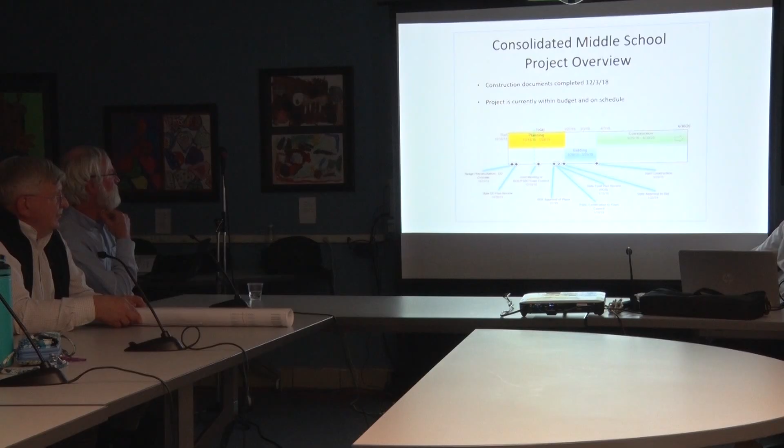So just as a quick review, the construction documents for this have been completed now. We've got them all ready to go up to the state for their final review. The project is currently within budget and, amazingly enough, after a 3-month hiatus, on schedule. The timeline indicates the joint meeting of the Board of Ed, PSBC, and the Town Council today at 12:10. We're looking by the 7th of January for Board of Education approval of the plans. The Permanent School Building Committee will then certify to the town that those plans meet the education specs no later than the 10th. We have a special meeting for that.

They're going up to the state for final plan review on the 15th. We expect to hear back from the state no later than the 25th of January. If that's the case, we'll be able to go out to bid as soon as we get that word from the state. The plan at the moment is that we would like to start construction no later than the 25th of March in order to get this thing completed on time.

So we have a very tight window, and the architects and all the folks at the administration and the board of education administration, Dr. Grenier and his people, have been wonderful in helping us figure out what we want to do with this space and how to make it as flexible and usable as we can possibly do it within the budget.

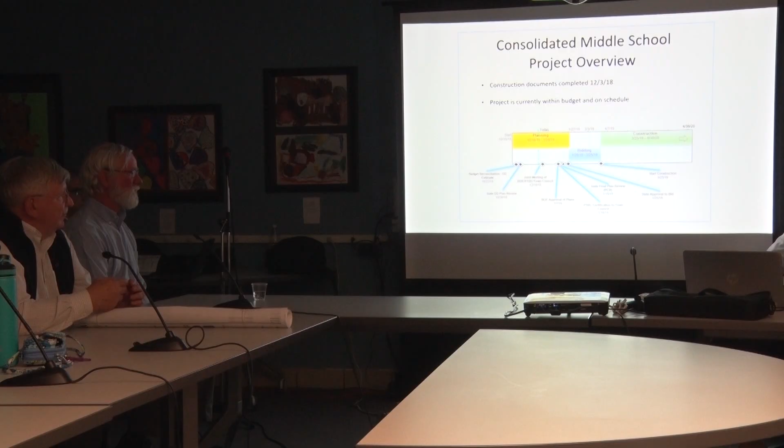So I'm going to hand this over to, oh look at that, that's the next one, we'll come back to that. That's at the end. So I'm going to hand this over to Amy Samuelson, who is with SLAM Collaborative, the architects for this particular project, and she's going to take you through the building.

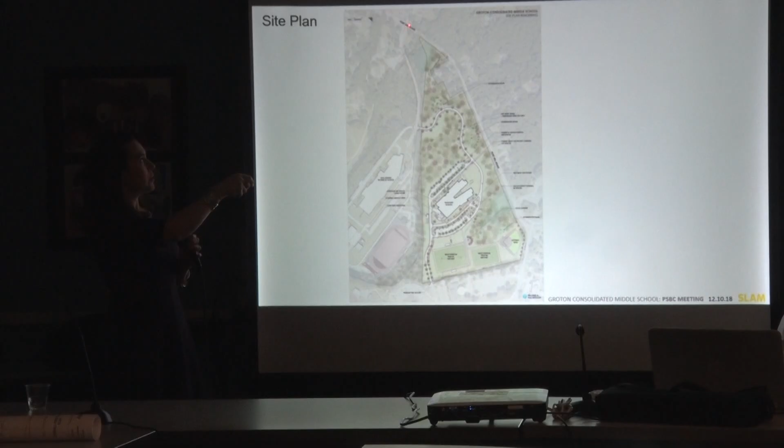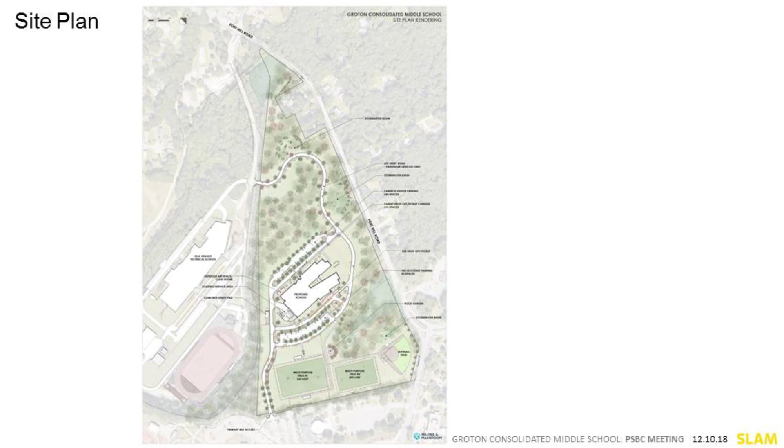And then the other entrance is off of Fort Hill Road, and you'll see that that shares the Ella Grasso Technical School driveway at a point a little ways up the hill of Ella Grasso. You'll find a new entrance to the site, and it meanders across the site because of the steep grade change from here to where the building is located. It takes a route around the hillside and up to the location where the middle school will be built.

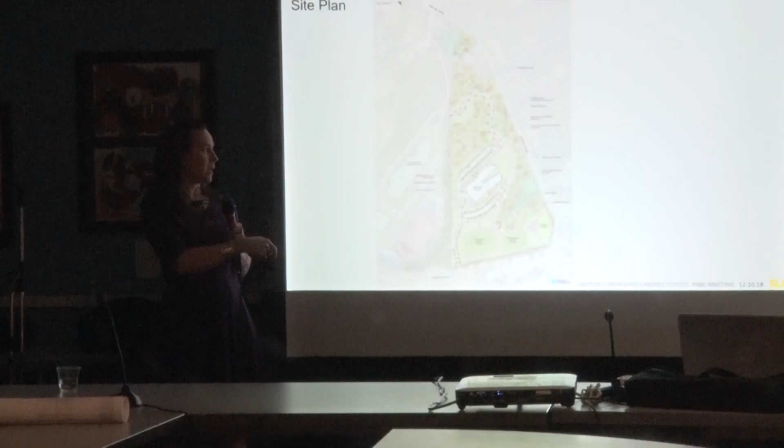So the middle school is situated in such a way that the second floor is the entrance level on the east side of the building. And because it nestles down into the hillside, the lowest level or first floor is where you access the building from the west side. So the entrances on either side of the building are actually on two different floors, but they're connected by a main concourse that you'll see in our interior renderings as we move forward.

Zooming in on the site plan a little, I wanted to share with you some of the site circulation. So again, from the Fitch High School side, you're passing the athletic fields that will be included as a part of this project. There's a large full-size field for athletic events, a smaller field, and a softball field included in the project.

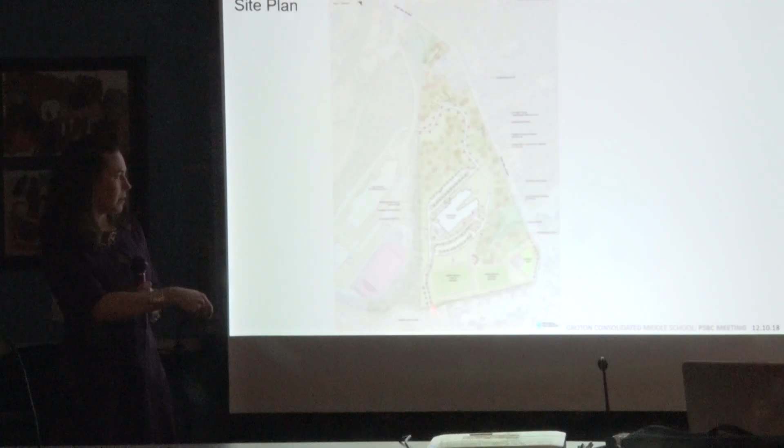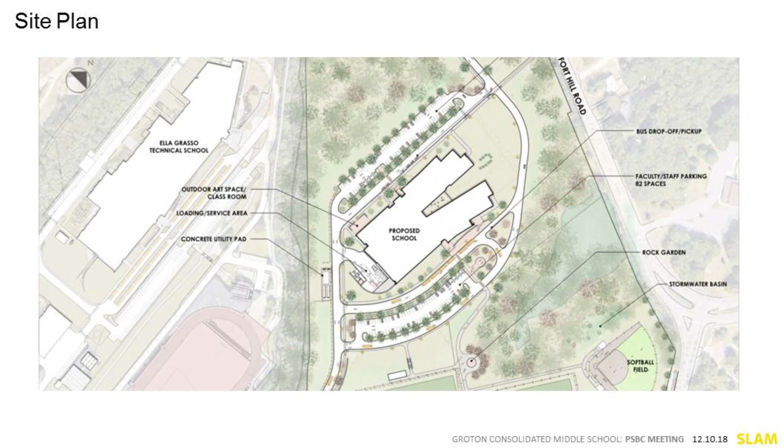So zooming in again, the site circulation is that the buses will come from Fitch High School, pull up and around, and drop off at this main entrance on the second level. Parent drop-off will come from the Fort Hill Road entrance and be directed to drop off at this lower level. This lower level will also be where the administration is housed and where all visitors will enter. So for security reasons, all doors will be locked to the school, including this upper entrance, and all visitors will be directed to the lower level.

After school hours, for events, you'll want to use this parking lot to access the fields and the gymnasium and some other public spaces within the building.

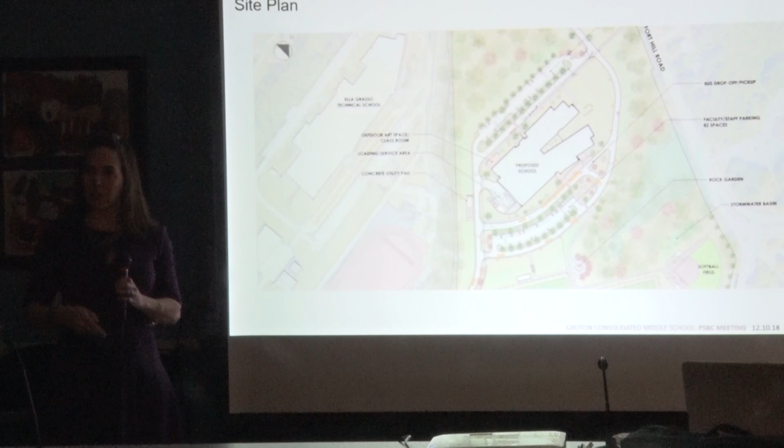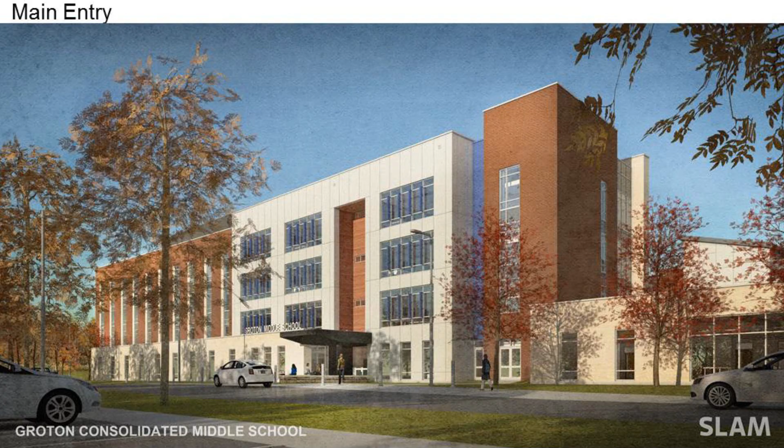This is an image of the entry of the building on the west side, the lowest level and main entrance. You'll be greeted on that side with a 4-story wing of the building, which is the academic tower. The first floor is administration, and above are the academic classes.

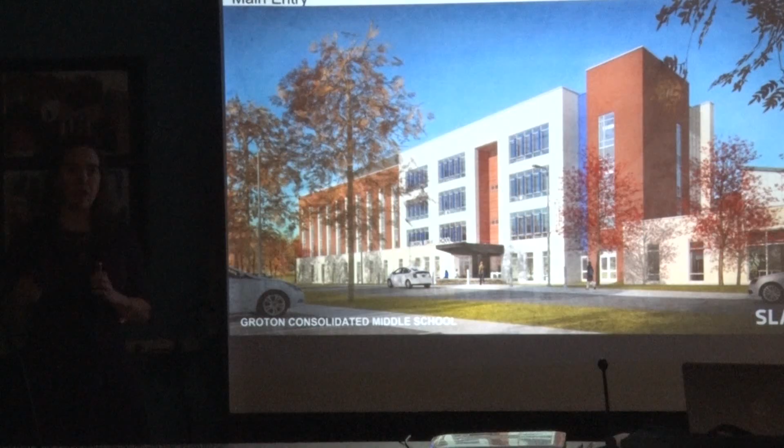Here's the first floor plan. The entrance is at this location, central to the building, with a locked vestibule for security where there will be a sign-in and a window to the reception area. All visitors will be badged at this location, then allowed to enter into the waiting room or pass through to the school proper.

In dark blue here is the administration, the guidance department, and the nurse's office and school-based health clinic. Also on that same corridor are some mechanical rooms buried into the hillside, and some daylit rooms including a couple of special ed rooms, a multi-disability room, and the ABA room.

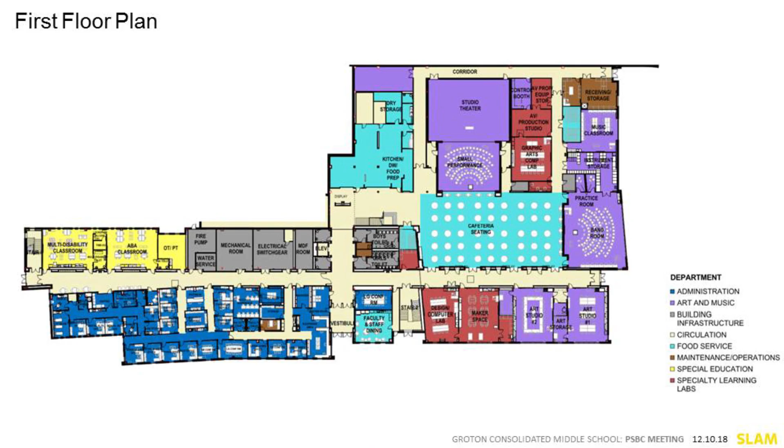On the south portion of the building, we call this the podium level. There's a mixture of visual and performing arts surrounding the open cafeteria. The cafeteria is really the heart of the building, allowing people to pass through on their way to band, orchestra, chorus rehearsal, or drama class. It also acts as a wonderful place for gatherings, and I'll share in the next few slides how dynamic this space can be.

Along the front portion of the building are a makerspace and engineering lab that speak to the STEM focus in this building, with an AV production studio and graphic arts lab in the rear. At the front, with generous windows, are the art studios.

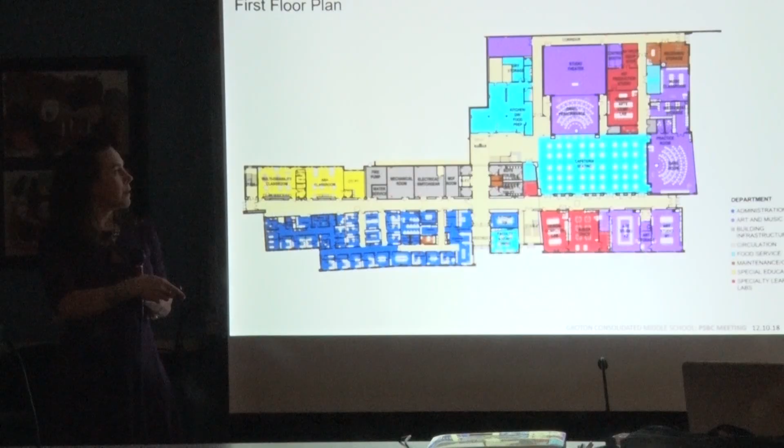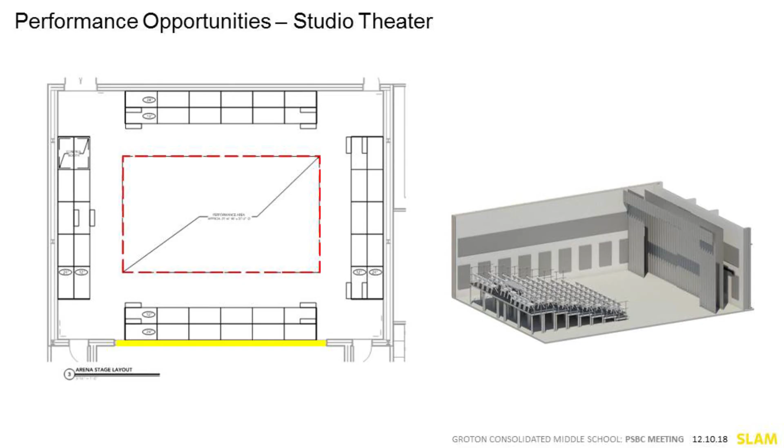Performance spaces can be held in many spaces within the building. We have a lot of flexibility built in here, and there's a studio theater — essentially a black box theater like you might have seen in other facilities. It's a new asset that Groton will be able to use.

Students from Fitch might want to use this too, and we know it's a great asset for this building. During the day the room will be used for choral rehearsals and drama classes, but with risers it can become a performance space in many configurations — set up this way, or with a thrust stage, or as a theater in the round. It'll be a really dynamic space.

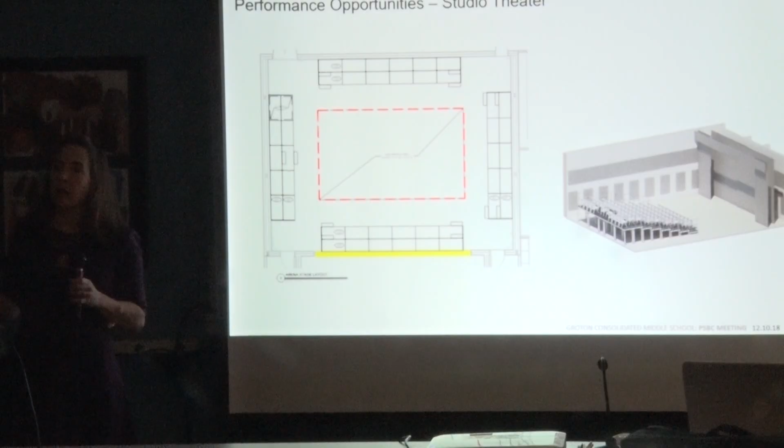Along this wall of the studio theater, you'll see what I've designated with a yellow line — that's a skyfold partition. It's a large 30-foot wide opening that rises like an overhead door, opening up to the neighboring room, which is a small performance room.

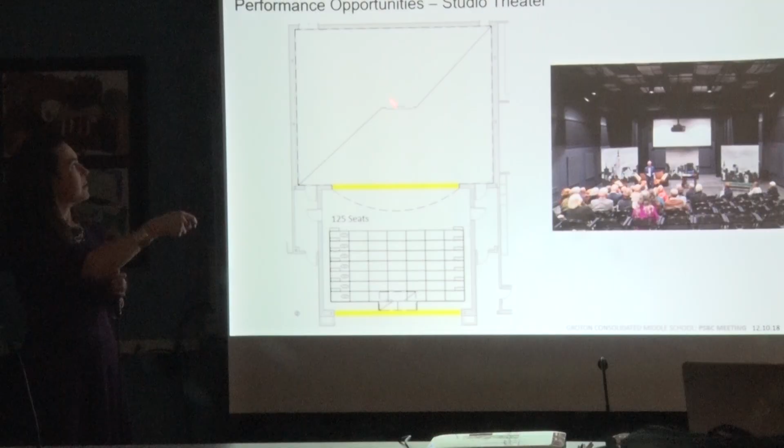So this is the studio theater we were just looking at, and you could put the risers instead into this other space, and when that demising door rises, you get a nice, very large performance space.

Those same risers can be set up as a flat platform for the orchestra to perform, where another wall opens up. This back one could be closed, and this other one could open up to the cafeteria, allowing for good audience seating of 270 people.

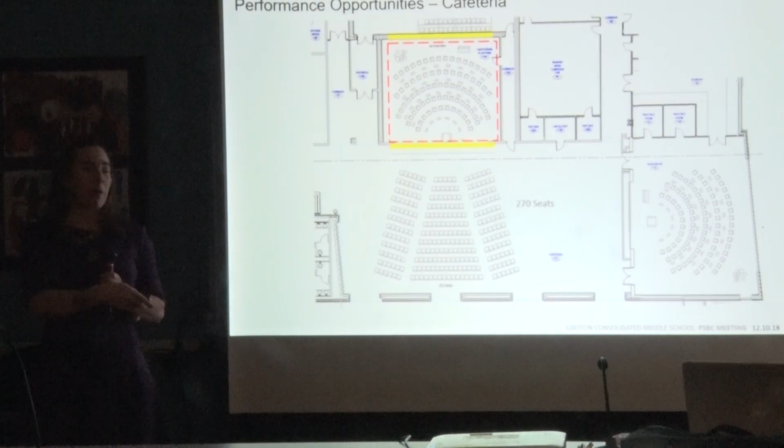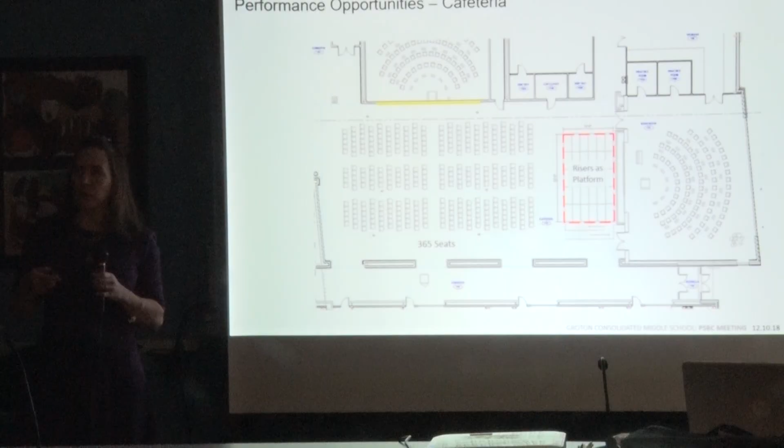Configured in a different direction, close that door, put the risers at the south end of the cafeteria, and you end up with a performance space for about 370 or 365 audience members. We're really excited about that space, and I hope it gets used in all sorts of different fashions.

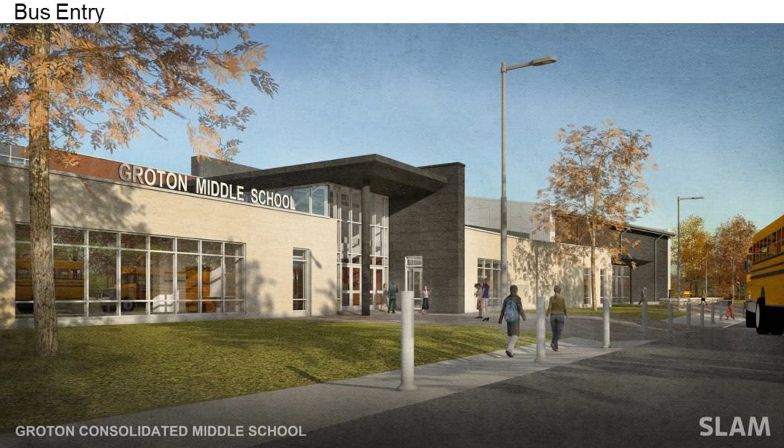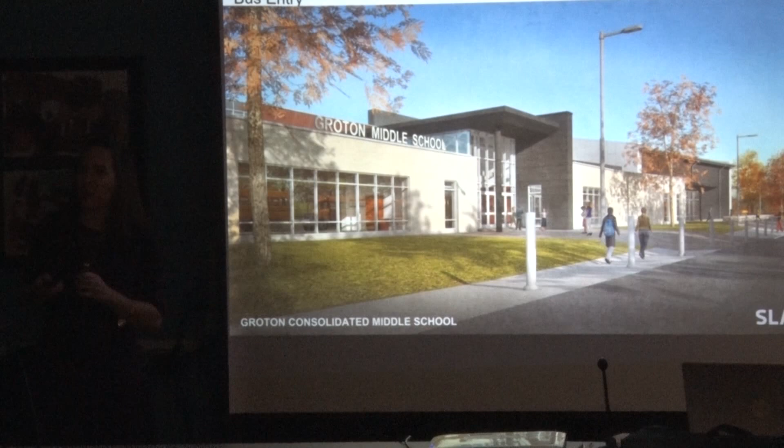The second floor entrance on the Fitch side, the east side of the building, is a totally different scale. We expect most students will arrive by bus or from Fitch, entering the site in this direction. The height of the building here is really 1, maybe 2 stories where the gymnasium pops up — a much smaller scale, welcoming, and we hope correct and fun entrance for the students.

Those students will enter the building here at the west end, at this main concourse, which travels down, and you can actually see down with a railing into the cafeteria below. A grand stair will take you from the main entrance at the west side down to the cafeteria for those performances I was just describing.

It also allows quick access to the Library Media Center and to the phys ed department, which includes a movement studio, a fitness room, and the gymnasium itself. Locker rooms and associated support spaces are also in that same area on the second floor.

The building can be zoned for security reasons. We never really want the public to enter the classroom wings, so for after-hours events, when the public is invited into the space and might travel down this corridor, there are doors which close off the academic wing. The academic wing includes standard academic classes, the science lab, a couple of special ed spaces, and a faculty workroom for support.

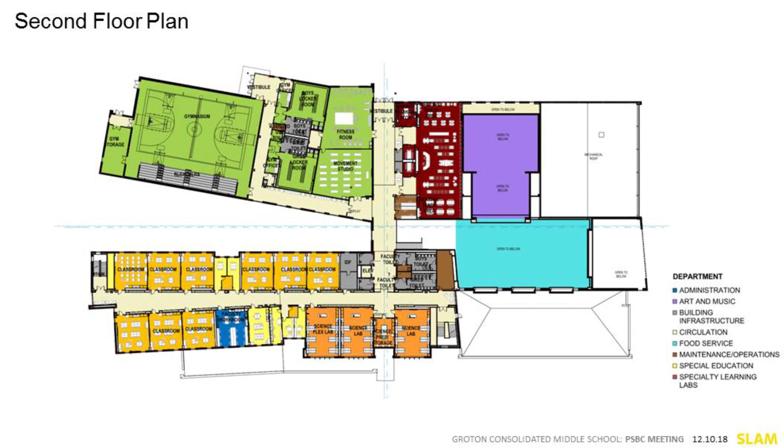On every floor, which can be set up as 6th grade, 7th grade, 8th grade, or set up in teams, there are 3 pods of classrooms on each floor and a pod of science labs. So you could instead do 6th, 7th, and 8th grade on one floor. Flexibility is built into the plan, allowing your pedagogy to develop as you move into the building.

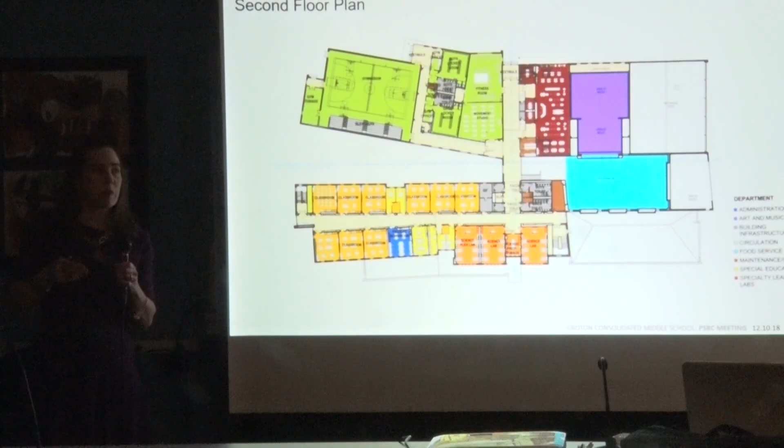That area would be zoned, so if the public is coming in for an event at the gymnasium or invited for a basketball game, doors would separate this area of the building from the remainder, or doors here would separate the cafeteria and lower performance spaces from the academic wing. We're trying to keep the most flexibility and use of the building in mind while also allowing for appropriate security.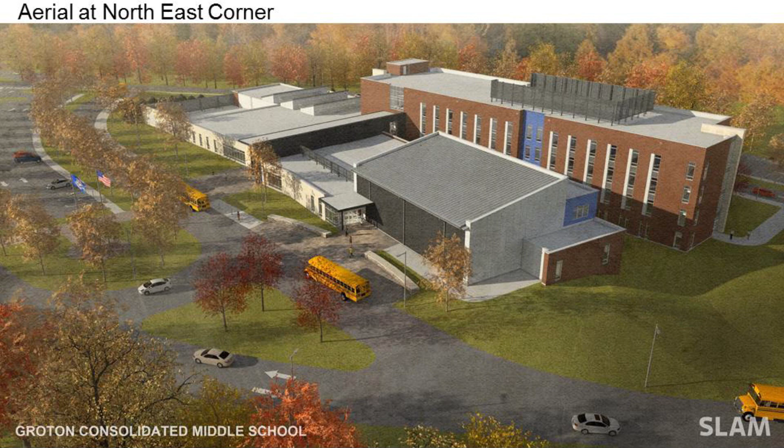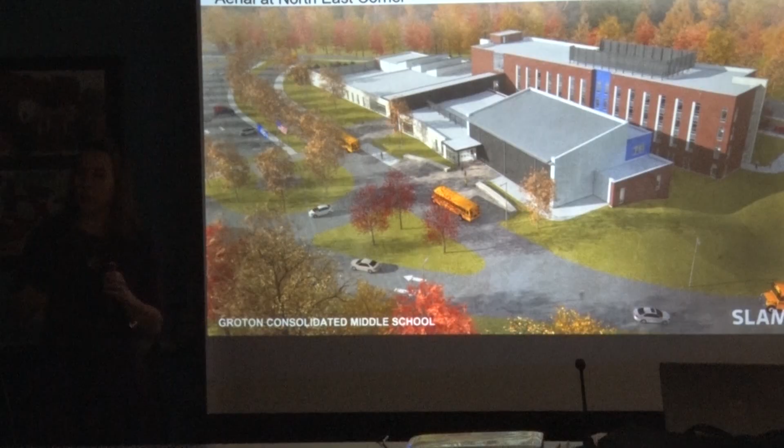This box here with a sloped roof is the gymnasium. If I go back, it's hard to tell, but there are windows into the gymnasium, so there is some natural daylight in there. Daylight's really important to us, so we've tried to develop that, and as we move through the interior spaces you'll notice that's an important feature throughout the building.

The interiors, the vast majority, are really set up with a palette of neutral colors: a warm wood tone and very neutral colors for the floors and walls for the majority of the school. We've splashed in some color for wayfinding and for just a nice amount of color, accent walls, and tile in the rest of the building. The way it's been designed, we really thought about nature—the ocean, the earth, the sky, and the heavens above, or maybe the sun.

As you move up the building, you're going from first floor, second floor, third floor, and fourth floor. Each one is designated with a color so that it's easy to recognize where you are in the building when you're getting on and off the elevator or the stairs.

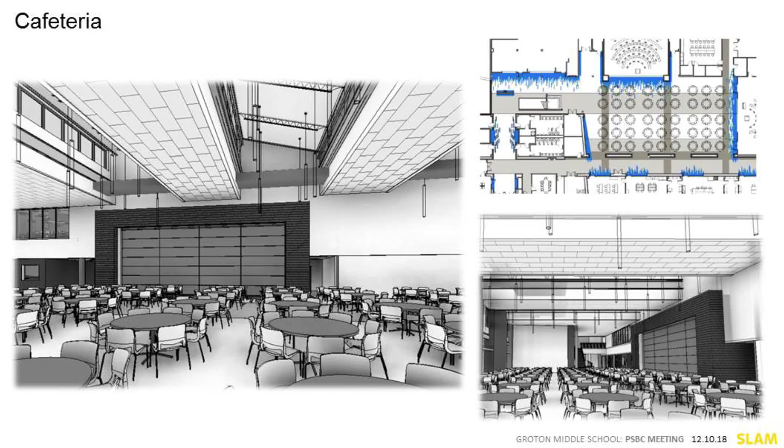The cafeteria has been developed as the heart of the building. Food service takes place in one portion, and then the main seating is here in color. You'll notice there are sawtooth clerestory windows above, so although it's on the first level and sort of buried into the center of the building, there's a lot of natural daylight you'll be able to enjoy in this space.

Beyond, you can see this peak. This is the concourse that brings you to the second floor public spaces, and also from the second floor parking lot allows the public and invited guests into the cafeteria area.

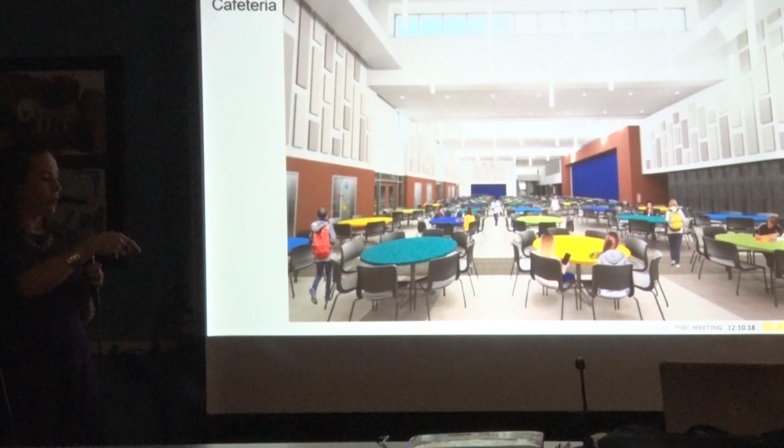I should mention also that for durability, the walls are brick, tile, and other durable materials at the lower level, and then as you move up, the painted gypboard is covered with acoustic material. While it will be a large space, we also know that we need to control some of that noise.

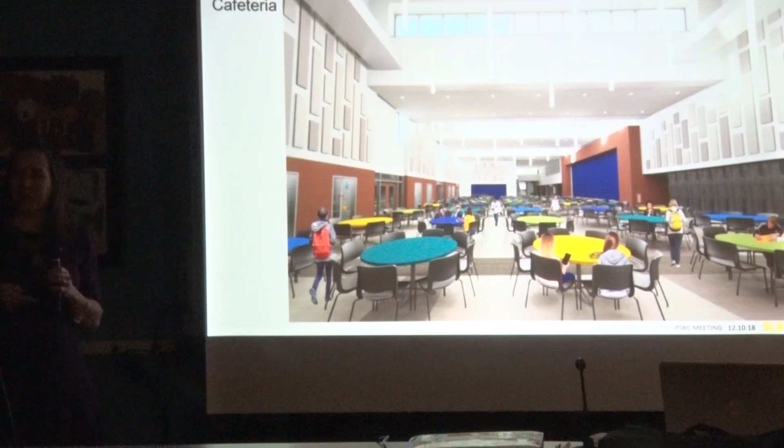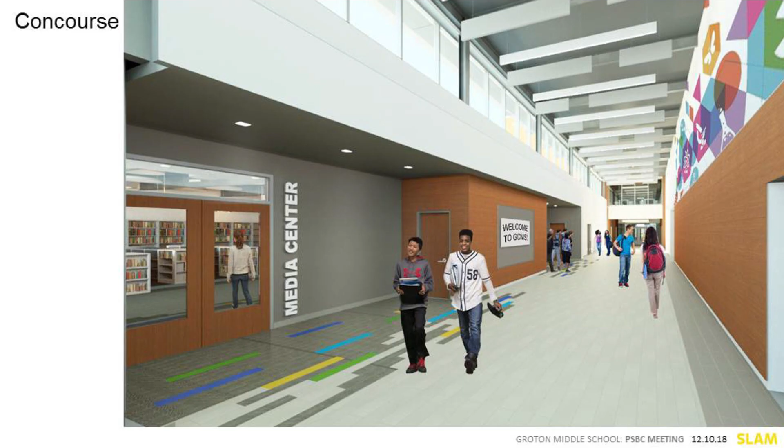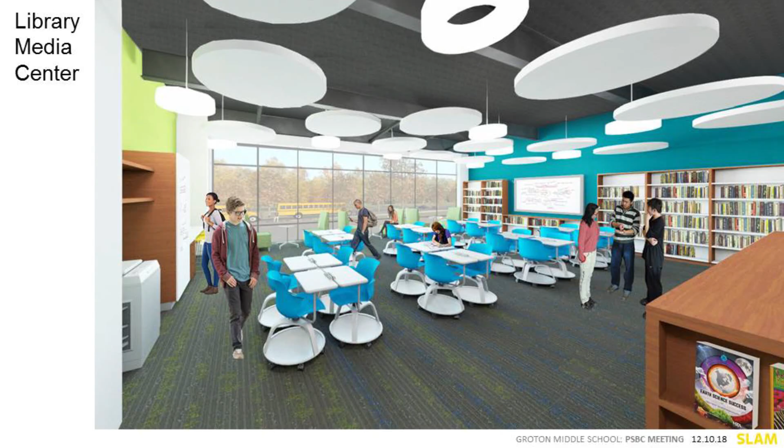Inside the Library Media Center, there's flexible furniture. There's of course the stacks, but we have high stacks against the walls, and in the center we have low stacks for visibility, so you can see that here. And the ceiling treatment has acoustic clouds, and some of those are lit, so they are the light fixtures as well as the control for acoustics.

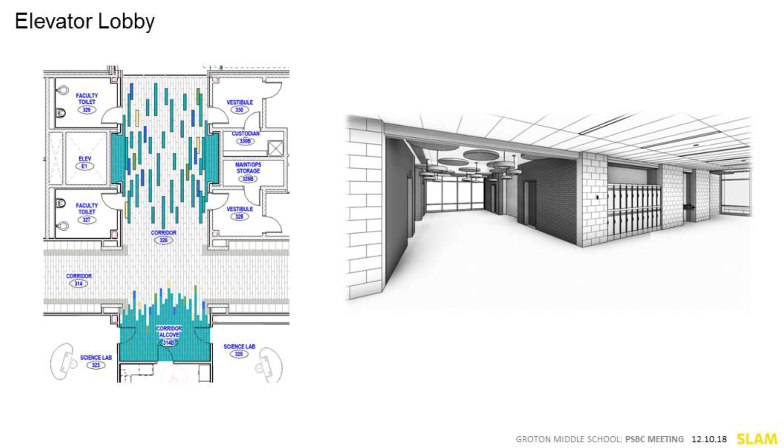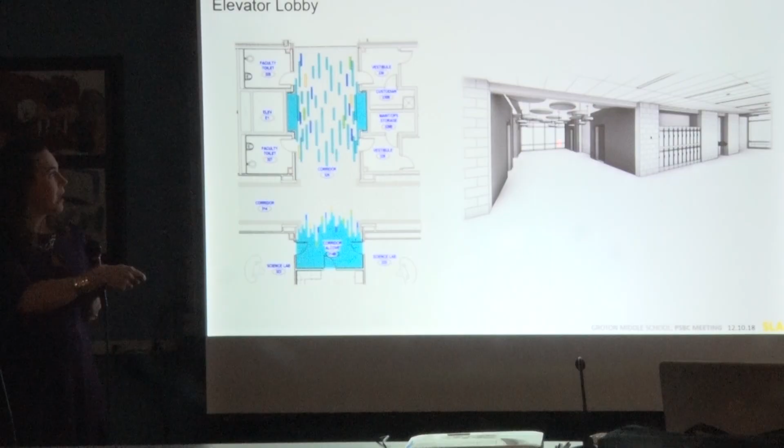The elevator lobby is also the location where the bathrooms are on every floor, and where the entrance to the academic wing is. On each side of the elevator lobby you'll see there are views. At one end of the academic classroom corridor there's windows, and also at the side entrance on the third and fourth floors. This is looking out toward Fitch.

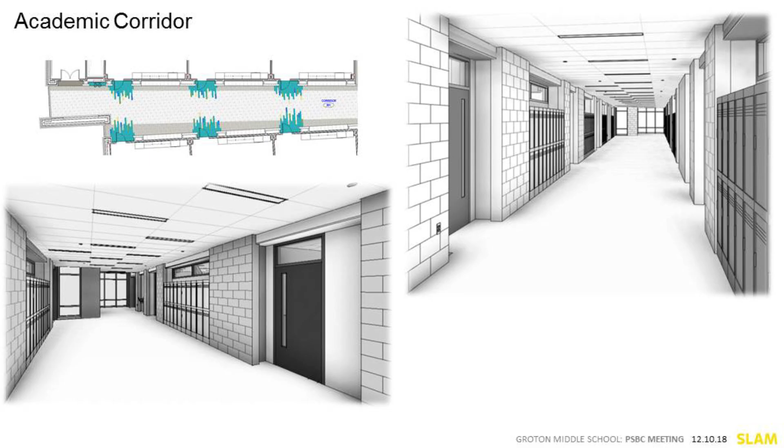In the academic corridor, of course, you'll find the lockers, but we also find it's important to have daylighting in there. Although it's in the center of the building, we've got windows that go from the classroom to the corridor, allowing you to borrow natural light from the exterior within the classrooms into the corridor, so you'll see windows above. But those are carefully placed for security reasons, for lockdown, so you get the daylight, but you also get the security.

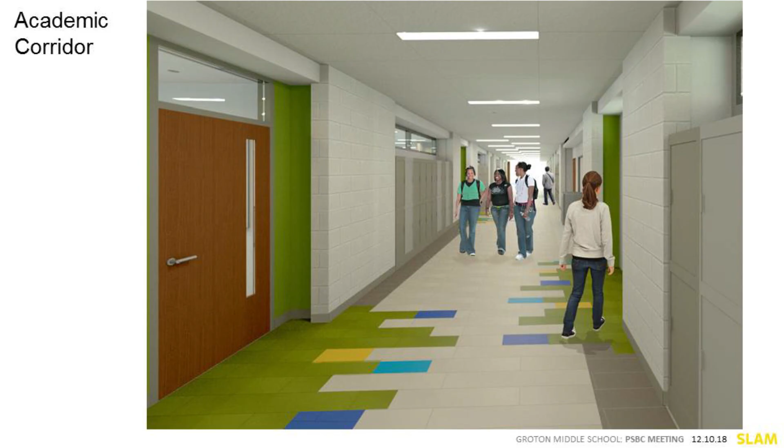The door has a narrow light, as do most classroom doors, so you can see out and make sure you're not hitting someone when you open the door. But you'll notice that narrow light is actually on the hinge side. This way, if an intruder was in the school and broke the glass, they wouldn't be able to reach the door handle. So these are little built-in security features we're trying to implement throughout without making it feel like a prison.

Yeah, for lack of a better word.

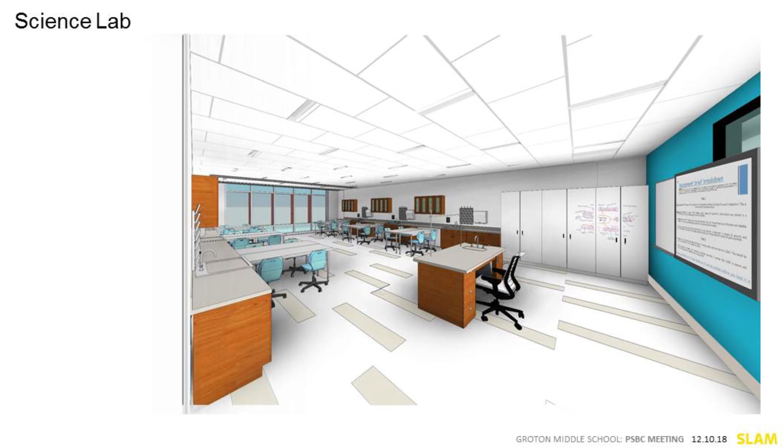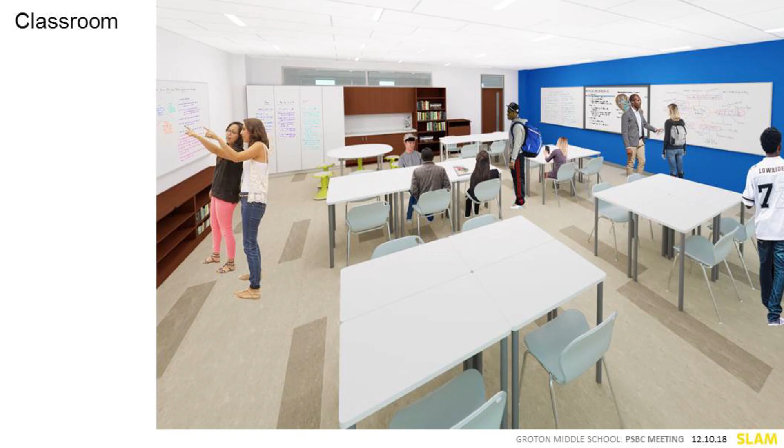Classrooms and science labs will have the accent color representative of what floor you're on—in this case, it's the 3rd floor. You'll see the built-in casework for the science labs, and in the classroom the furniture is very flexible. It's a series of desks that can be put together in groups or taken apart, set up like this for a seminar, but allows the teacher to set it up as they'd like. There's also some choice, with a round table and some choice of seating.

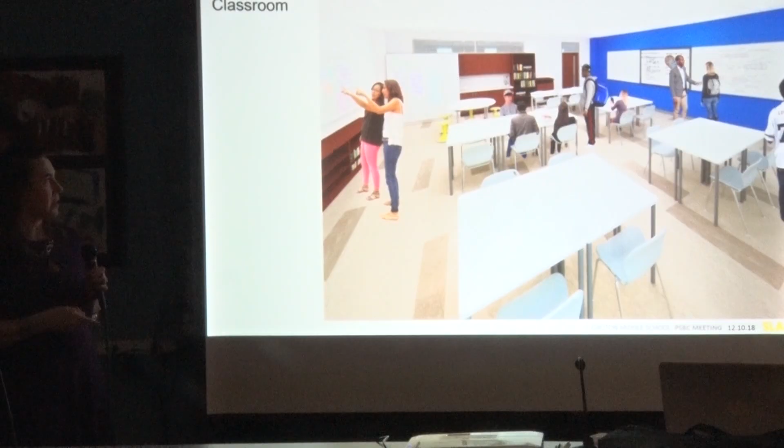Thanks, Amy. I'll take the opportunity to thank you all for having us here today, and I hope you're all excited as we are for such a great design. We're thrilled how it's come together. My name is Kemp Morhardt from the SLAM Collaborative. As Amy mentioned, I am the principal in charge for this project, and we've been working very diligently over the past 5 months—yes, only 5 months, hard to believe. But we're all thrilled with how the design has come out, and I hope you are too.

The last bit of the presentation is a video of the outside of the school. So strap your seatbelts on.

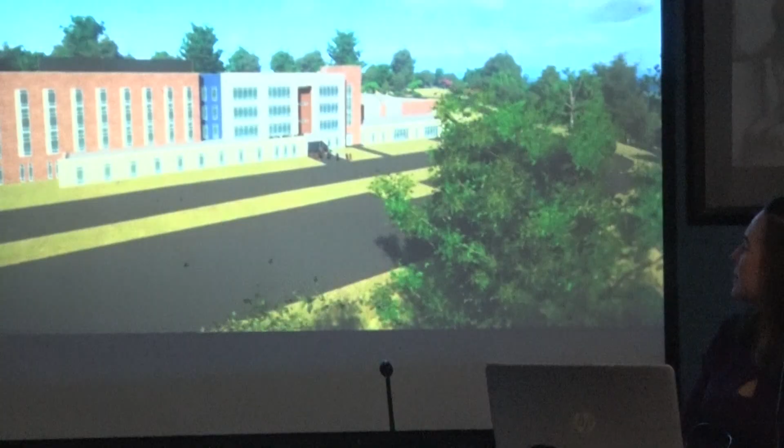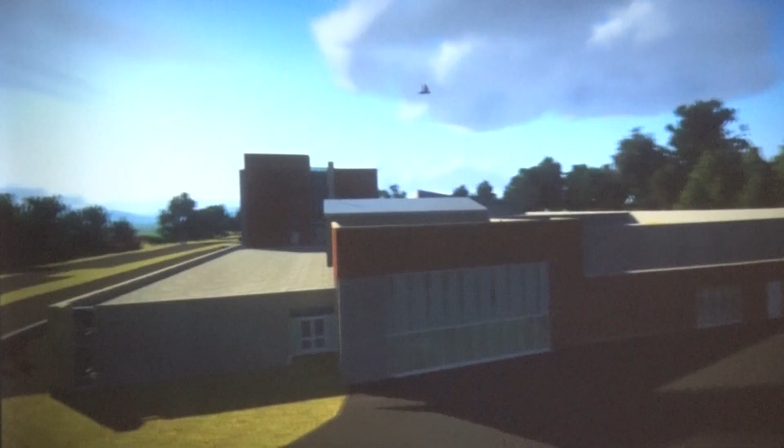You can see the sawtooth over the cafeteria. Moving around to the keyboards—that's right, the keyboard. Love that, I think that is so cool. The new windows are intentionally designed like a keyboard. This will be the bus drop-off. Moving to the gymnasium. And then there's that space in there too.

The kids are designing an outdoor STEM classroom for this space in math class. They want to see it to fruition, so they've got a couple of different plans. Some chose that corridor, and some chose other areas out in the outside part of the building.

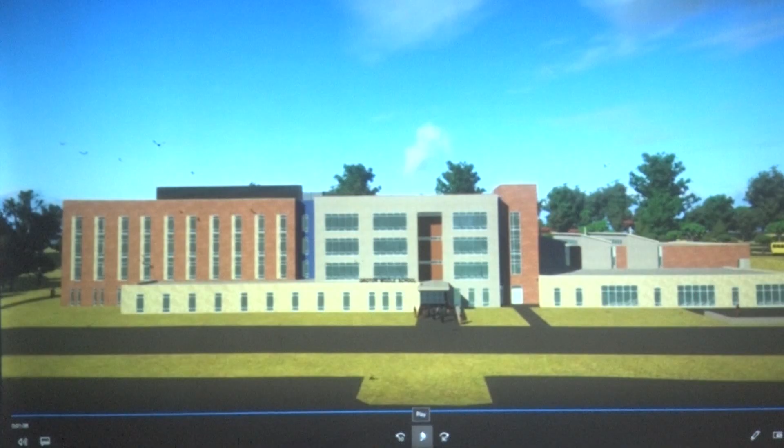Andre, could you turn on the lights? Go to the last slide. Which is the first, second. There are more chairs back here if you guys would like. Jay? Rita? Oh yeah, if you can plug in for that, do that. That would be great. One last image before we go to Bob's closing. You're going to say one more thing.

My name is Jack Butkus. I'm a program manager with Arcadis, and we're assisting the town with all 3 of the projects for the 2020 plan.

One of the tools we've used on other projects, you've seen the fly around and the site plan. But what is this really going to do within the neighborhood? So we've got a little before and after. We don't have all the site features like the sports fields rendered in, but go ahead.

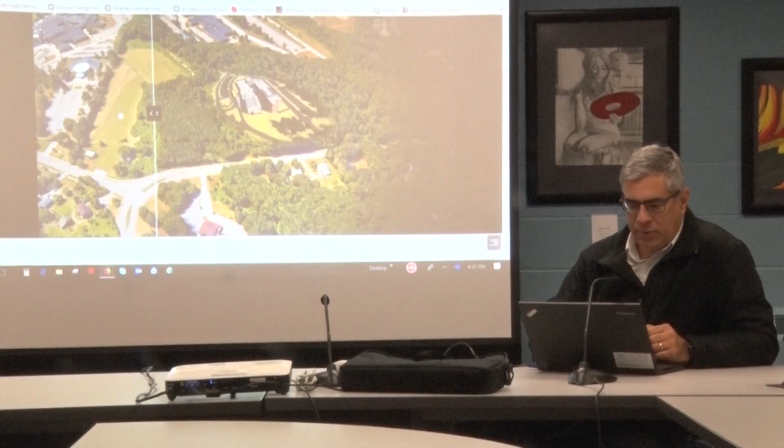This area here in the darker green is the wetland that is going to be preserved and avoided by construction. The softball field will be up here in the area where the Merritt House exists, the smaller practice field centrally, and the larger sports field down here close to where we will tie in to the Fitch driveway.

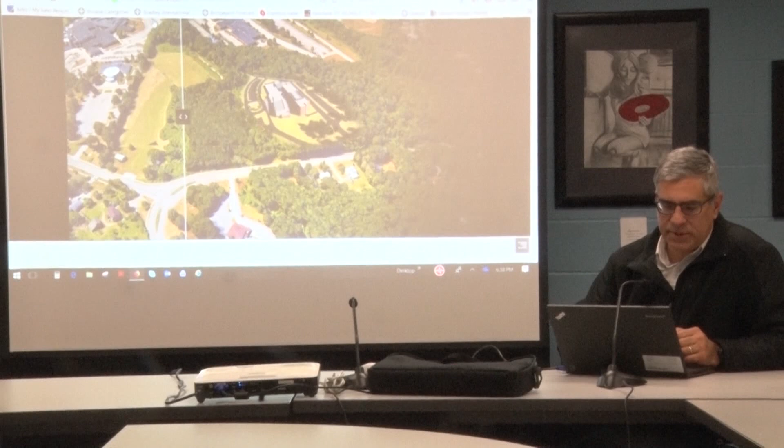This is going to be reconfigured slightly in this area of parking for the buses, and parents will move up to the front portion of the Fitch. Right now the buses drop off here; that'll be converted to parent drop-off, and the bus loop will come into this back area through the side parking lot at the rear of St. Mary's Church. There will be an access way cut through the trees leading into this loop drive and into the campus.

I have just two questions. One, if I were getting married on a Saturday afternoon in that church, and there's a soccer game going on, how rude are we being to the church? Are we far enough away that some bride isn't going to be cursing us somewhere?

We do have screening requirements in the town plan. There's a significant wooded buffer right now. We need to complete that buffer.

Will the wedding video include cheering from a crowd? I don't think so, because it's indoors for the wedding. Depends how loud the bride is. Well, they are closer to the high school, I think, but they're not next to the athletic fields. So I was just thinking of that.

The other thing is, at one of the newer schools in Waterford, the parent pickup drop-off area, somehow they must have thought everybody drives subcompacts. Because we're all in minivans, and it's the scariest thing I do every day is pick those children up from that school.

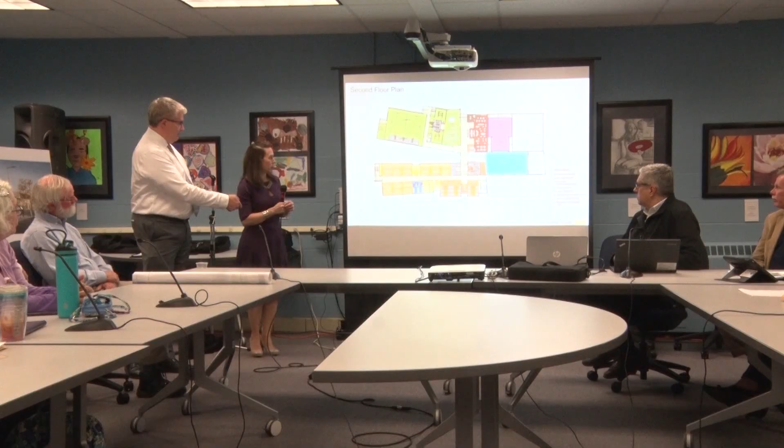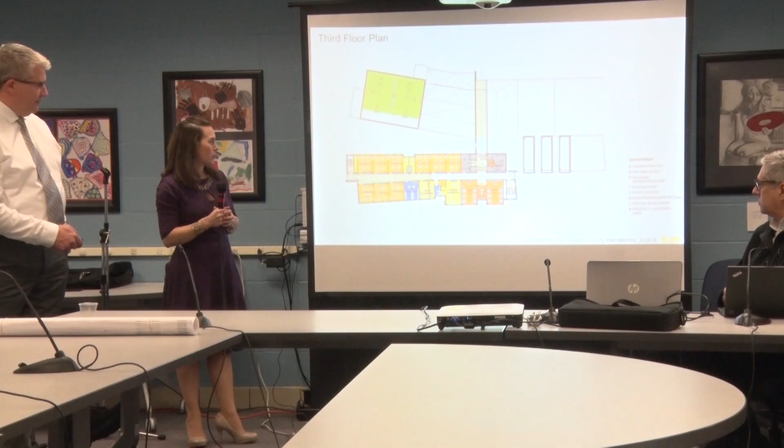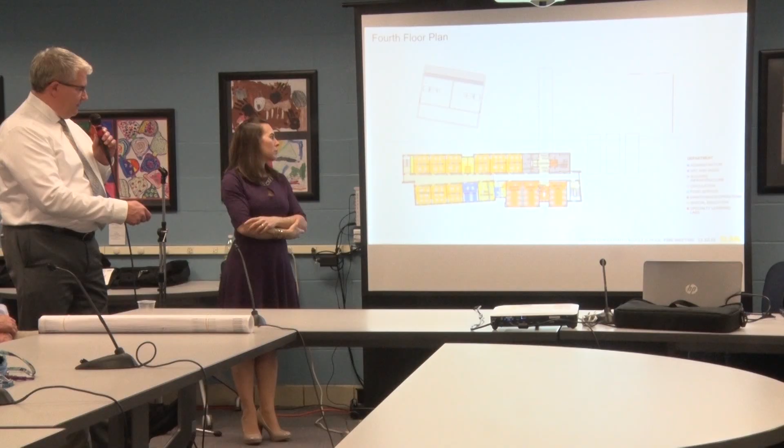So the resource rooms, you'll see them on the floor plan here—I believe there are 4 of these, there might be 5, on one floor, with administrative offices on the upper levels. There are 2 graphic arts rooms, one on the second floor and one on the third floor. Special ed is in yellow on the plans. We have the resource rooms on each floor, for a total of 6—these are small tutoring-type rooms for 6 students. And then we have the special ed classroom here.

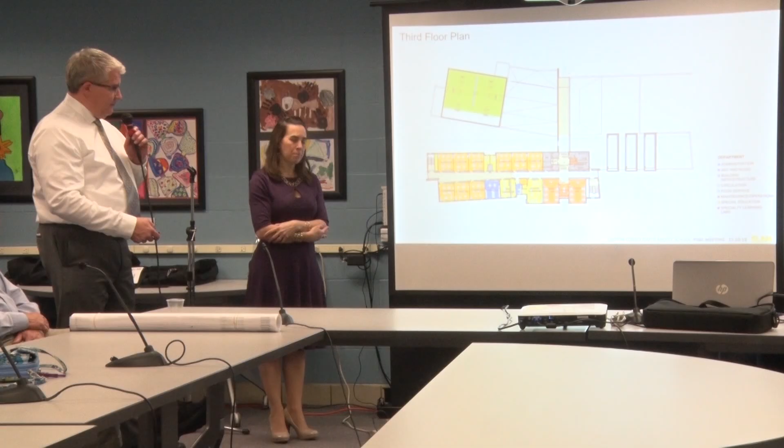And would foreign language be part of the academic rooms? Yes, part of the 27. All right, thank you.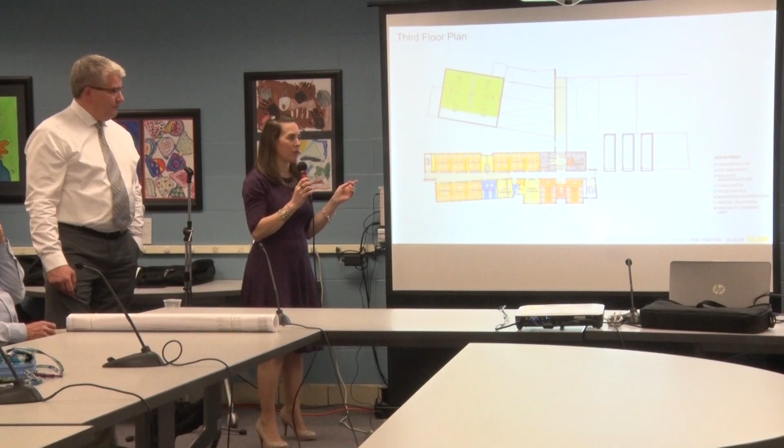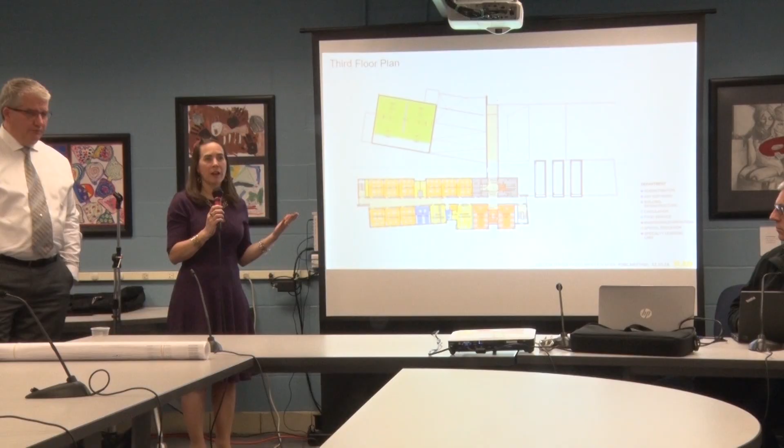I think now would be a good time to mention that the faculty workrooms are sized so that in the event a classroom is shared by more than one teacher, each teacher has their own space in the faculty workrooms, and there are faculty workrooms on each floor. Those spaces are also set up so multiple faculty members could work together on projects they're bringing into a group of classes.

Rosemary, you have your questions. What are the yellow stripes on the end of the building? That's a shaft. That shouldn't be yellow because that's misleading—I'm sorry. Is it a special ed shaft? It's not. It allows for mechanical systems to travel from floor to floor.

I'm curious about the potential for maybe solar panels on the roofs at some point—is that something that could be factored in? Absolutely, solar is a great resource that can always be added. There's a lot of space on this roof, and that can certainly be added at any time. We're actually looking to put infrastructure in for the three sawtooth roof areas—they're facing south, so they're perfectly well suited for it.

Having gone to school there, there's a lot of wind. Is there potential for any sort of wind energy also? We haven't designed wind power into the current plans, but again, it's something that could be added by the district to supplement the energy provided. We looked at a number of alternate plans, including geothermal and wind.

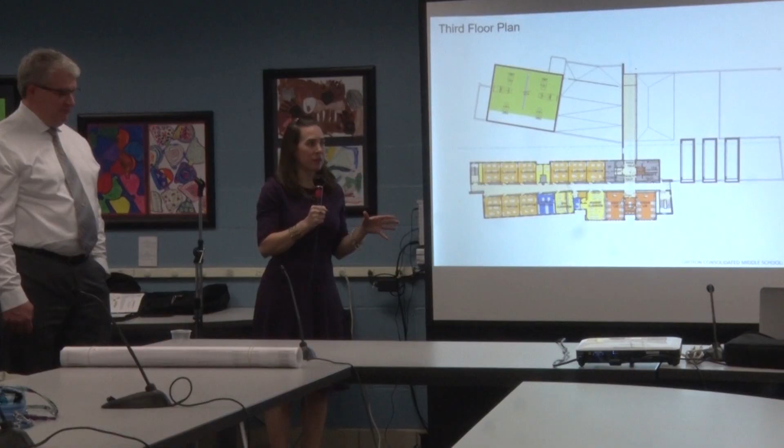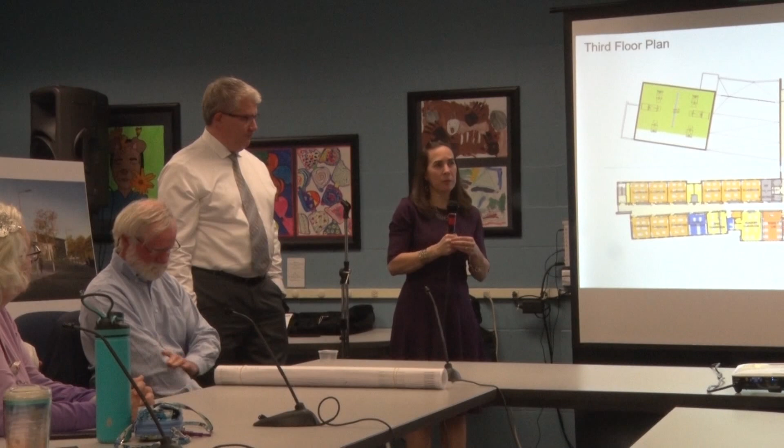You also asked about the mechanical systems. As Bob mentioned, the chilled beams will provide heating and full air conditioning for the building, so it'll be quite comfortable and very efficient. There is ice storage on site, so the chillers that cool the building make ice and store it, and then utilize that ice for cooling rather than a chemical. You make the ice at night when electricity is off-peak and less expensive, and then draw on that stored ice during the heat of the day.

Connecticut High Performance requires this building to be LEED Silver equivalent, so we're tracking that as we move through the whole design, and as we progress through construction we'll continue to track it and make sure the building meets or exceeds the Connecticut High Performance standards. If you're familiar with LEED standards, silver or above is what's required, and we plan to exceed that. We have a lot of features built in.

The other thing I want to mention is the quality of the exterior of the building. The building envelope, the amount of insulation at the roof level and in the walls, will really be your first line of defense and the way to maintain a very efficient mechanical system. So that's where we put a lot of our effort.

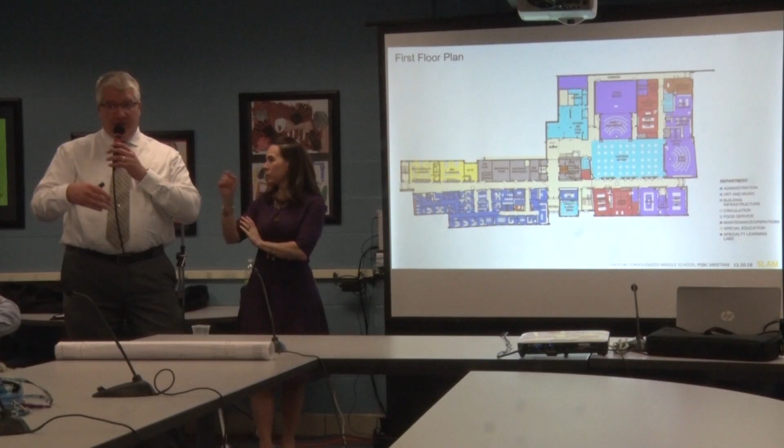The graphic arts room is up here. One thing not on this plan is there's also an outdoor area right here outside the art classrooms, so there can be an outdoor studio as well - it's a small patio area. That's my second question - can you speak to that, please?

So these windows here are associated with the two art rooms, and there's a nice little patio area. These two window sets relate to the two art rooms. This in-between room is for makerspace, and there's a patio area out here that can be used. It's all windows, so they have a lot of light and visual stuff. On nice days, they can take easels outside and draw and do whatever else they might like to do there.

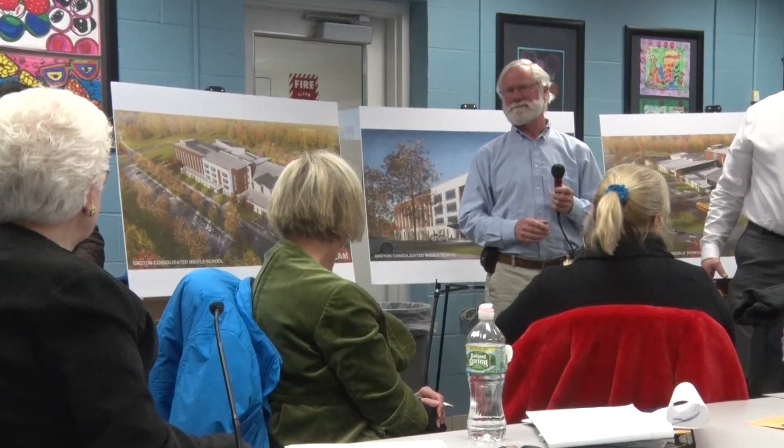There is no garage door. But my follow-up question, and I think Rita mentioned the outdoor spaces. I know this is a public meeting, but how on earth are you going to protect kids when they're outside drawing or whatever they're doing out there?

It's a legitimate question, and I'm not sure the kids will ever actually be out there, but the space is available for light to come in and to visually see what's going on. It's a difficult question. One of the nice things about this site is that two-thirds of it is wooded. I would love to see trails in there so kids in biology could walk through the paths, see the ponds and trees, and use the space as a learning center. That'll come down to the superintendent and Board of Ed determining how they can safely do these things, or if they can at all.

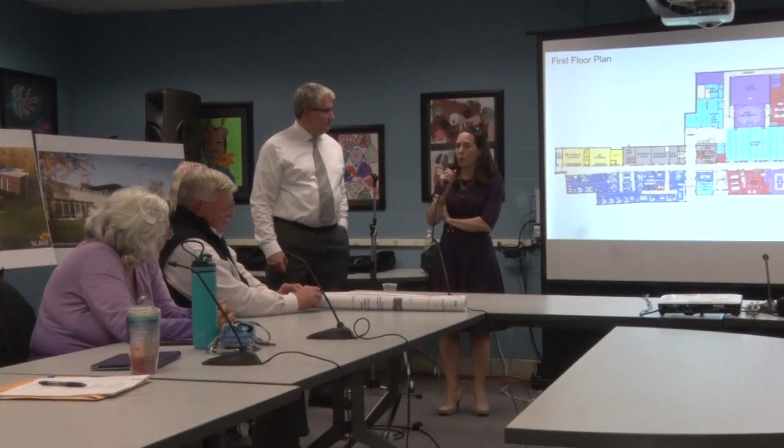I'll add that the door accessing the art rooms is off the corridor and controlled by a card reader lock, so appropriate staff will be badged to go in and out, but otherwise that door remains locked. That's the same condition as when students go out to play on the fields for PE classes. In an oversight condition, it's up to the district to determine how they want to handle that. But you have that example happening in PE classes every day, so why not in art?

Recess, yeah. Well, not in middle school, yeah. I want to go back to middle school. Outdoor time, I think they should have it.

But as part of the security features, you also have a lot of electronic security built into this school. There's video surveillance at the entries on the site, as well as at the doors, and then within the school there's video surveillance.

Is there a place for security to keep an eye on all of that video? Yes, there is a room built into the administration wing. It's actually a protected room, so in the event of an emergency, someone could run the situation from there. We also have an SRO assigned to the building, and that's his office, or hers.

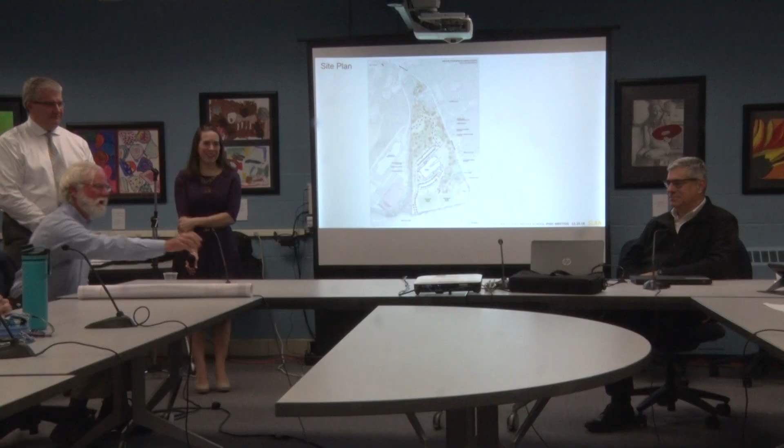All right, I have a question. After five and a half months of looking at this building, what do you folks think about the design?

It's gorgeous, it's wonderful. What's nice is that it blends well with the Fitch addition. It really gives the campus feel, so I'm sure that was intentional, but it really does help show that we have a campus. A lot of it, when I looked at it, I thought, why aren't they giving us a picture of the Fitch building? And then I looked and realized it wasn't. So I'm very appreciative of that.

I love how you incorporated the first and second floor, so we have two distinct entrances. And I love that we have a full-size gymnasium, and for those of us in rec always looking for spaces, I'm very appreciative of that. I'm also really appreciative of the design of the drama and music spaces, because we have an incredible music program at all levels, elementary, middle school, and high school, and for that to continue to flourish is exciting.

I think it's beautiful, I just get to weigh in. To have a softball field on campus is a huge factor as far as I'm concerned. We ship our softball team all the way across town. And the Black Box Theater, well, we talked about this for hours, we just think it's terrific.

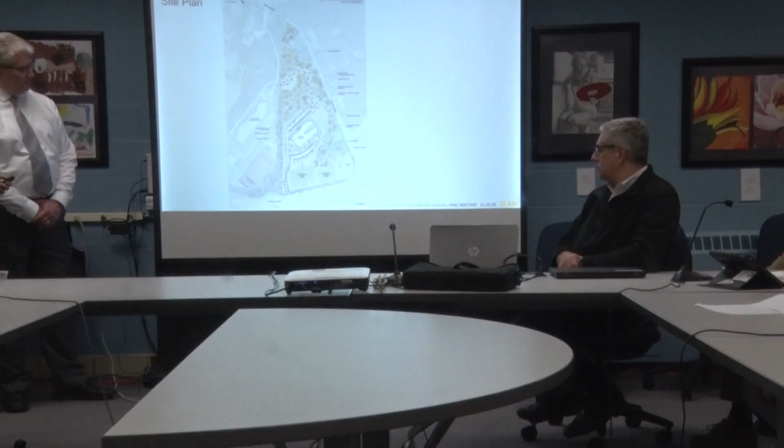It's a tunnel. It's a tunnel? No, a shuttle. We could get Elon Musk in.

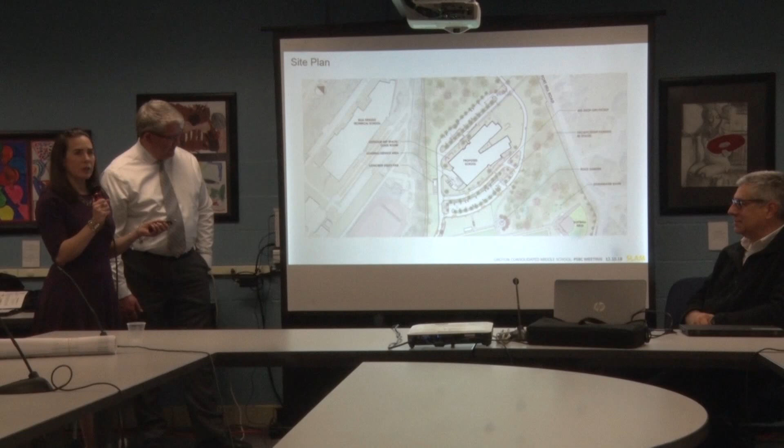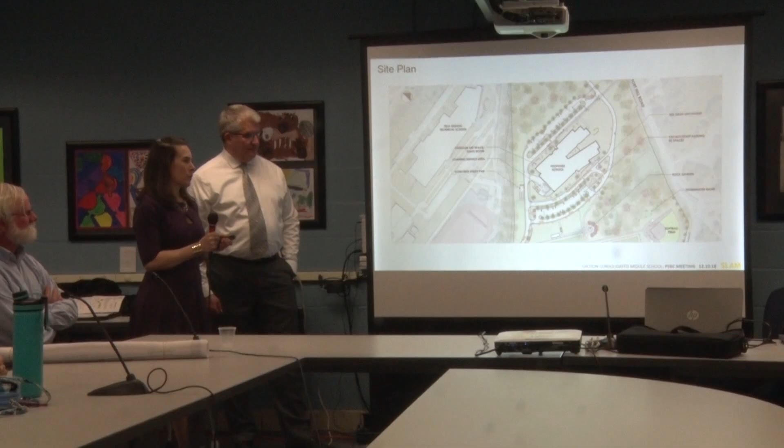There is a sidewalk alongside the driveway, and it's 6 feet wide. The driveway for cars is a full two-way driveway. But the 6 feet is the sidewalk. I'm sorry, I didn't recognize what you were asking.

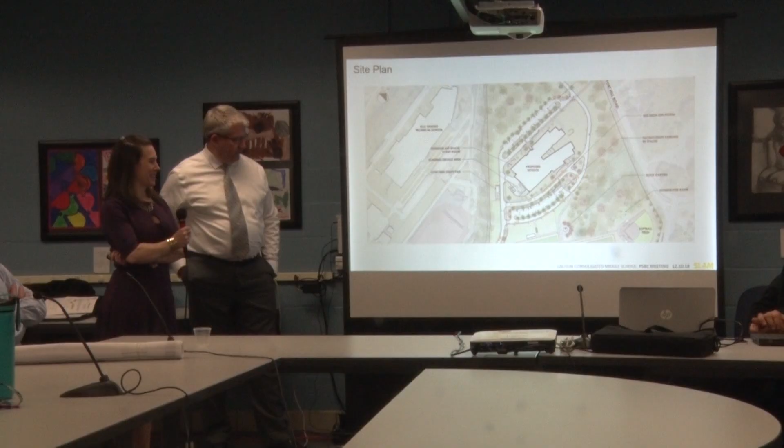I just wanted to say, for me, the thing that excites me is to see Groton all under one building like it should be. Growing up here and having 3 middle schools at one point, and seeing the demographics, the diversity, and the socioeconomic separations was so dynamic that I'm excited to see all that under one roof, and seeing one strong PTO in Groton in the middle schools. Excited to see all the resources pooled into one building. So what this building brings to me is hope for Groton, and that chance for students to get together at an earlier point in the academic spectrum before they get to the high school.

One of the other positive things I saw on this diagram was the color per floor, really thinking of children with special needs getting off and realizing some people relate to color. I thought that was genius. This brings hope to me for the town—I think it's long overdue. Thank you so much.

Just to remind the board, if you leave here and you're up in the middle of the night with a really important question, probably don't call Dr. Graner at 2am—jot down your questions so he can get answers, or he might contact these folks, so we can have another discussion next week. Before we vote on the 7th, we'll have another discussion. This is probably our time to look at the designs, unless there are enough burning questions. Maybe Bob and Rick come back with the designs for another conversation.